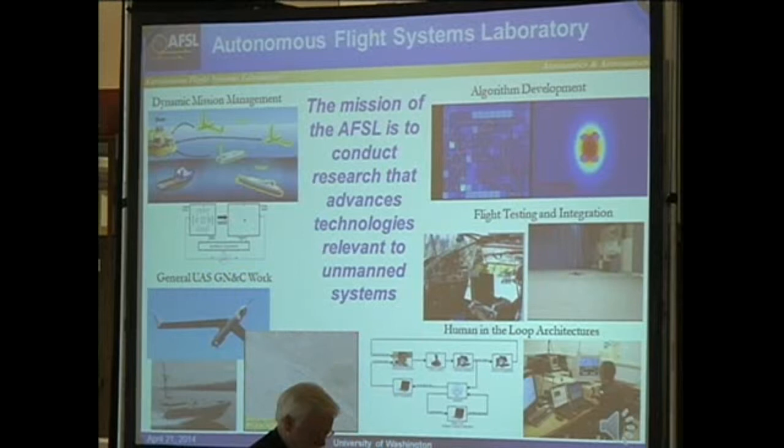The goal of the Autonomous Flight Systems Laboratory is to conduct research which advances technologies relevant to unmanned systems. Historically, the majority of our work has focused on control algorithm development, but we're also very interested in things like flight testing and integration, human-in-the-loop architectures, and general UAS research.

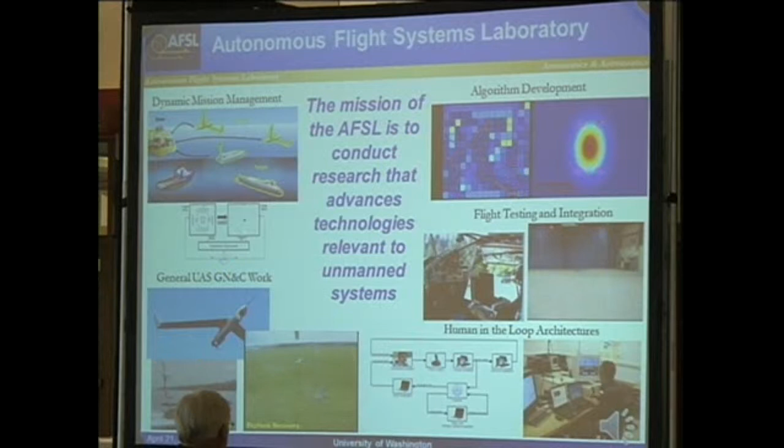One of the things that makes our group unique is that we're very interested and focused on transitioning ideas out of an academic university environment and onto fielded systems.

This current JCATI project focuses on partnering with Insitu, a UAV company that Dr. McGeer started, based out of Bingen, Washington. They're actually a wholly owned subsidiary of Boeing at this point. What they've done historically is produce the ScanEagle UAV, and you guys have probably seen footage generated by it.

You may recall the 2009 hijacking of the Maersk Alabama. Well, that footage was provided by a ScanEagle.

As Insitu starts to diversify their product line, one of the newest and most exciting pieces of technology coming out of that company is not another aircraft, but rather a ground control system and software package. The system is called the Insitu Common Open Mission Management Command and Control, or ICOMC2 system.

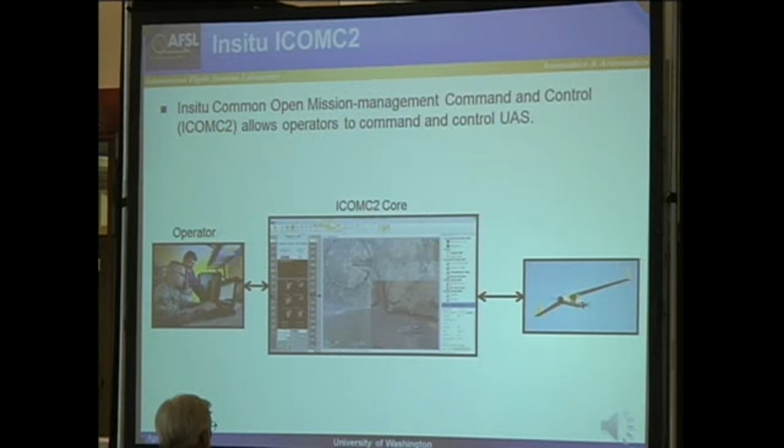The idea with ICOMC2 is that it's a software package that allows an operator to interact with the ground station in a nice, easy-to-use fashion. This system can communicate with and control one or multiple STANAG 4586 compliant aircraft.

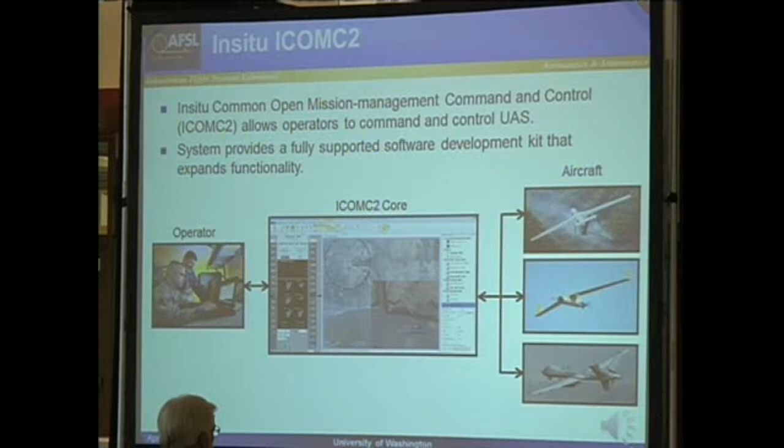What makes ICOMC2 unique is that it supports a fully supported software development kit that can be used to expand the core functionality of the system. Our JCATI project makes extensive use of this, because we're trying to create an additional application which runs on top of the core to extend the functionality of the entire system.

This software model probably sounds familiar to you, and personally I think about it every time I download an app onto my phone. I know Insitu probably doesn't want me saying this, and it's probably not their official marketing term, but I like to think of ICOMC2 as almost like an app store for UAS.

Do you guys remember those iPhone commercials with all the happy background music, saying things like, do you want to check how many calories were in your lunch? Well, there's an app for that. Do you want to log into your webcam to watch your dog sleep while you're at work? Well, there's an app for that, right?

In our situation, we want to take the system and extend the core functionality to assist unmanned systems. So our pitch might be more like, do you want to increase operator situational awareness in a multi-UAV stochastic system? Well, we have an app for that.

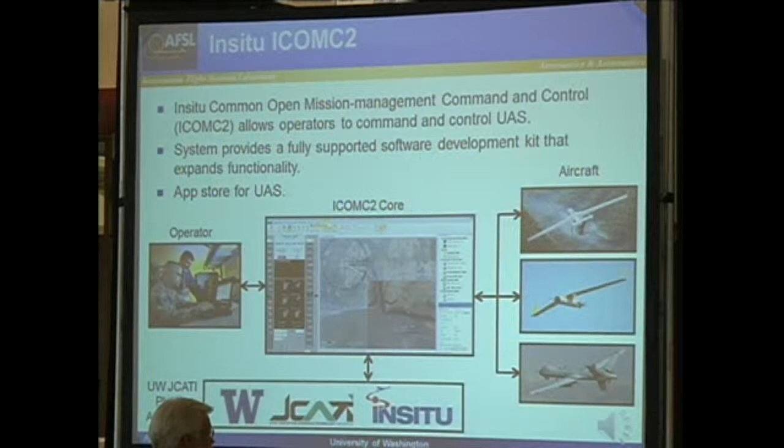I guess if you say it like that, it doesn't really roll off the tongue, so I'm sure Insitu's marketing team needs to do a little work on that before we run the ad, but that's the general gist. So what are we trying to do here?

There's been a lot of talk here, and I've been chatting with people at the networking session. There's a lot of excitement about the possibility of operating multiple aircraft simultaneously in the national airspace in the near future. Amazon.com would love to have you believe that soon we'll have a swarm of drones over the city dropping packages off to you within minutes of purchasing it.

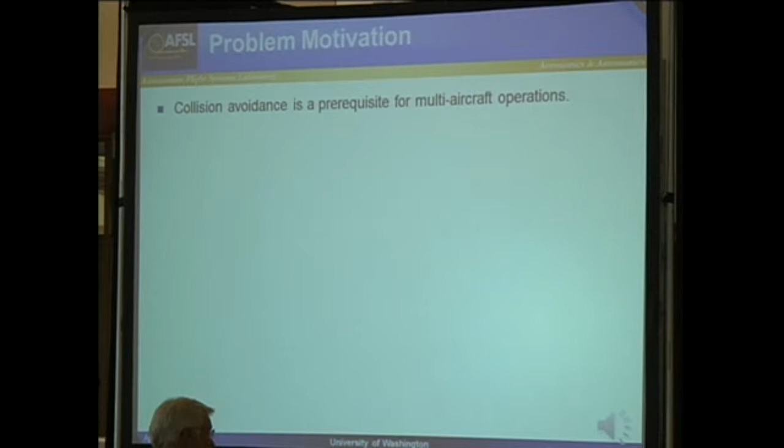But the reality is, in order for that kind of vision to become reality, there are infrastructure and baseline technologies that I think are important for us to investigate. Collision avoidance is probably one of the most important of these.

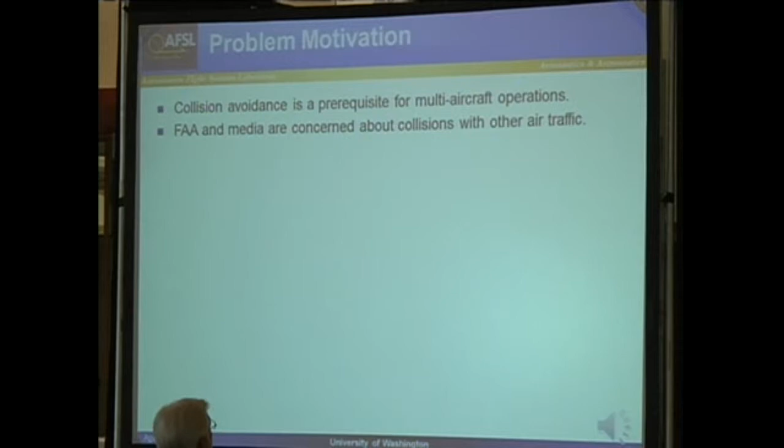So what do we have to worry about with collision avoidance for unmanned air systems? The FAA and the media would probably like you to believe that you really need to worry about collisions between unmanned systems and general aviation traffic.

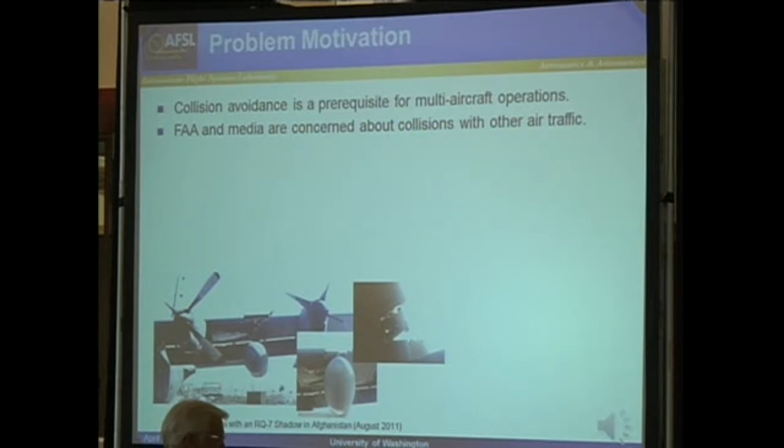This has actually occurred. These are pictures showing an incident in 2011 where a C-130 collided with an RQ-7 Shadow over Afghanistan. I don't have a picture of the RQ-7 because, as you can imagine, it didn't fare too well in this meetup. It was interesting that Bill Rodman was talking about working on wings for the RQ-7 - maybe if it had those wings, the Shadow might have turned out a little better. But in this case, it didn't work out so well.

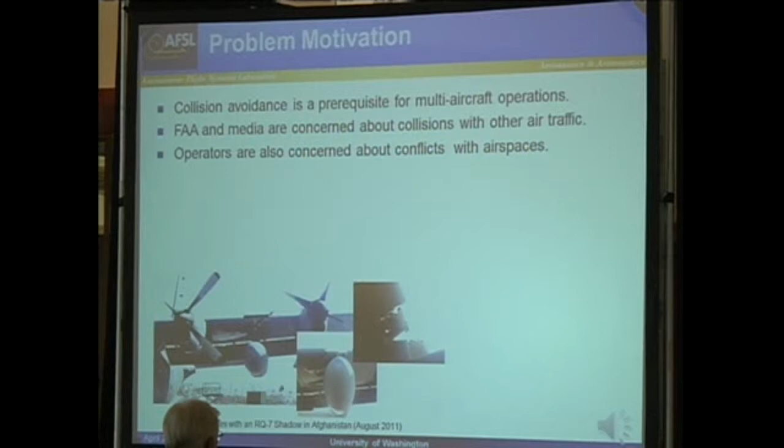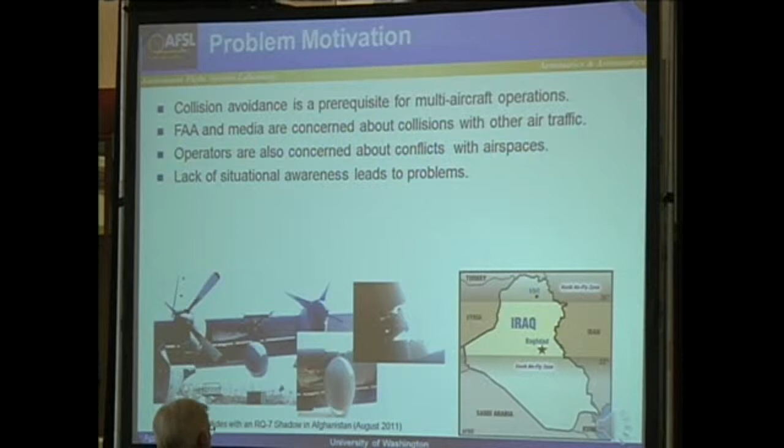So in any case, what really causes a problem from an operator's perspective is a lack of situational awareness. What we are trying to do is create a collision warning plugin or app for the ICOMC2 system, which is in charge of increasing the operator's situational awareness with respect to future collisions or conflicts.

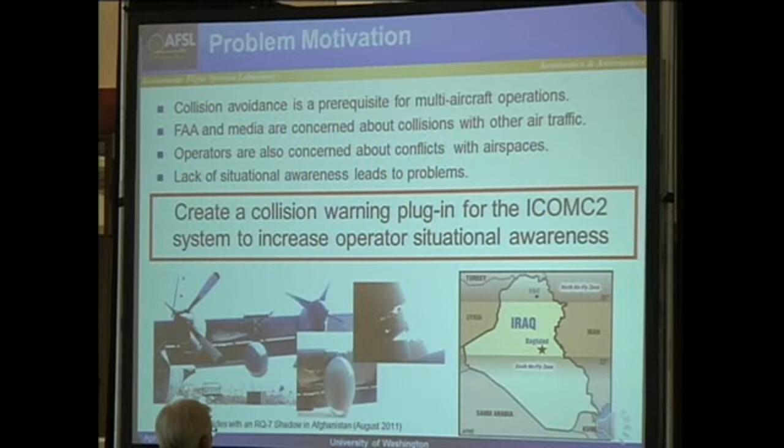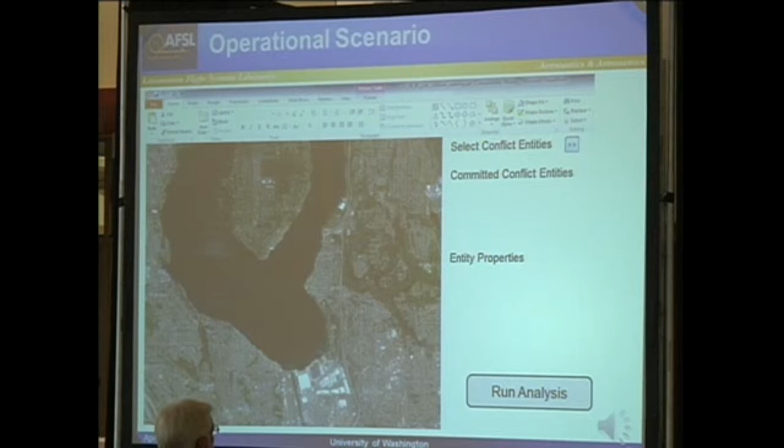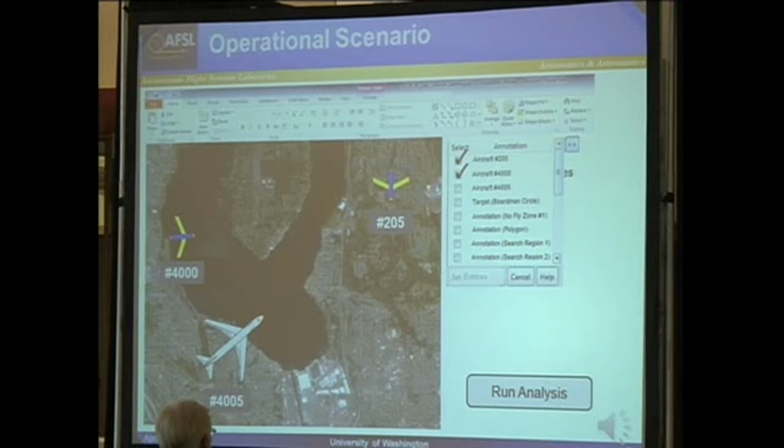I think the easiest way to look at this is to walk through a use case of how this system might be used within ICOMC2. In this scenario, you might have multiple entities in your theater of operations. We'd like to provide the operator a way to select from that list and say there are certain aircraft they care about our plug-in managing. Once the operator has chosen these entities for the plug-in, they would be able to select an individual vehicle.

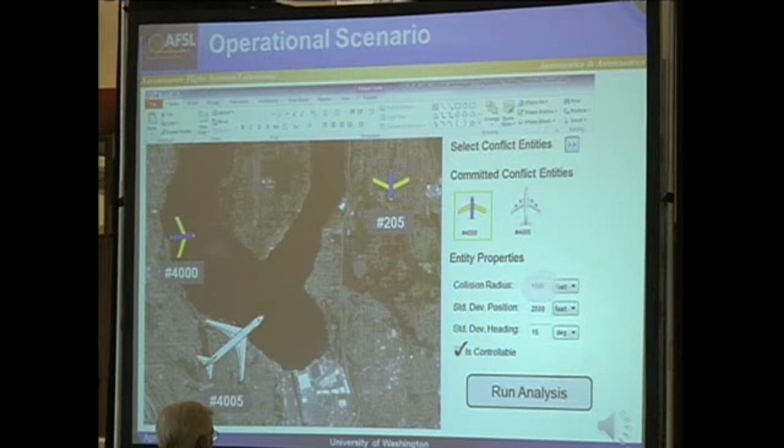Then they could potentially modify vehicle-specific parameters - for example, increasing the buffer radius or the airspace that a certain vehicle claims. Once the system has all of this information, it would be able to run some kind of stochastic analysis and provide feedback to the operator, highlighting areas of potential collisions or conflicts in the future.

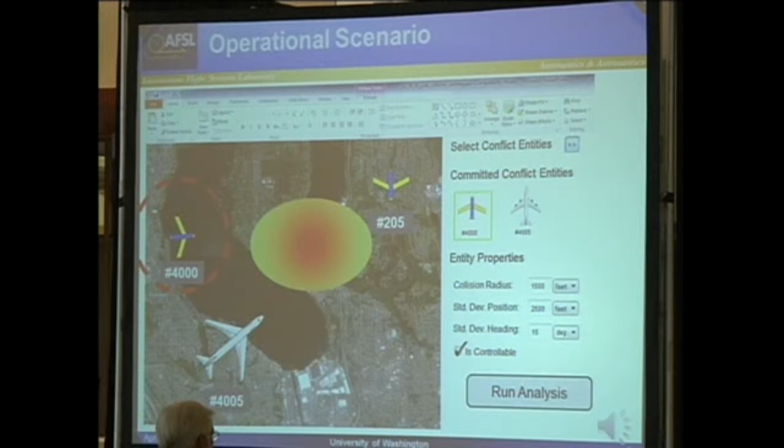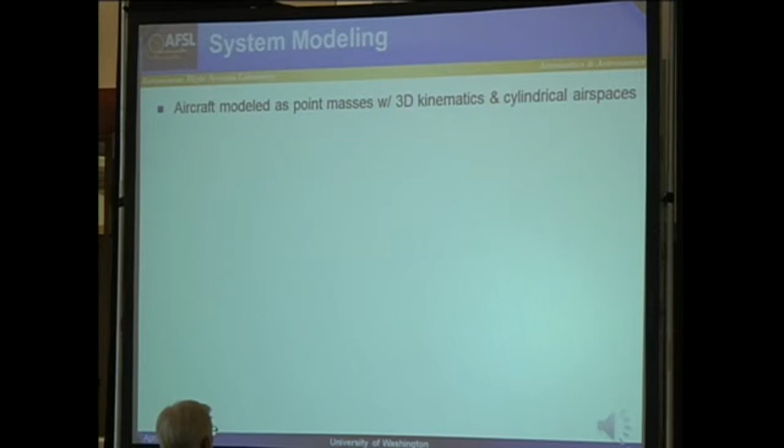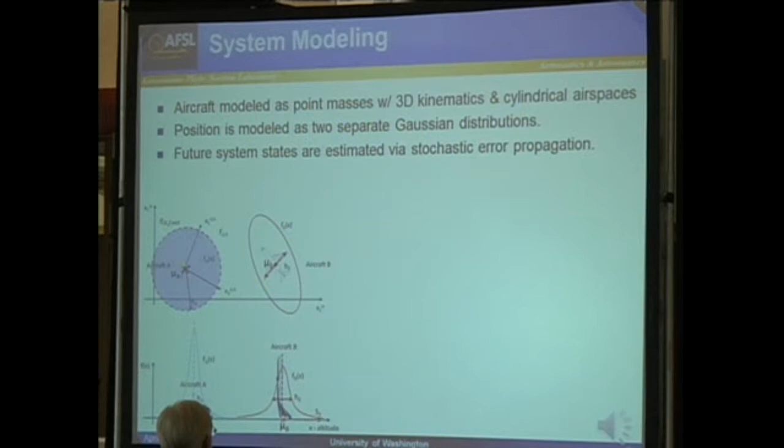Behind the scenes, we're modeling these aircraft as point masses with 3D kinematics and cylindrical airspaces. We also want to model the positions of these aircraft as stochastic random variables. We use a two-dimensional Gaussian distribution to describe the planar position of the aircraft, with an independent normal to describe the altitude. Once we've got all of that information, we can propagate the system states forward using a stochastic error propagation technique.

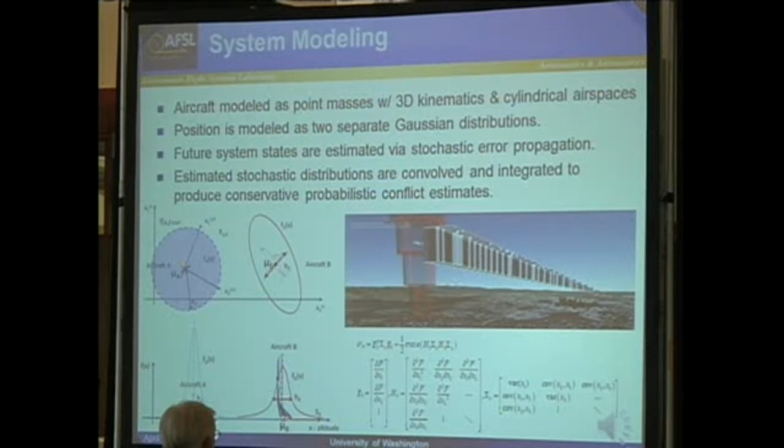For example, on the graphic on the right, if the aircraft starts out in the background, we're able to propagate the system states forward and estimate where it's going to be. You can see this illustrated by increasingly large confidence ellipses as you go forward. Finally, once we have these future state estimates, we're able to convolve and integrate them together to provide conservative probabilistic estimates of potential future conflicts.

I think the easiest way to look at this is to just look at this scenario in action. We've got a very simple simulation showing how this system works. To briefly describe it, we've got two entities here - one aircraft off to the west, which is supposed to simulate a commercial airline flight going from Seattle to Pullman.

Maybe this is the flight some of you guys were on. Personally, the students and I actually caught the bus. And there's a funny story with the bus, too - we picked up the bus at UW and came over here.

We were expecting it to be like this Greyhound charter bus, but when we picked it up, it turns out that somehow it was actually the University of Washington football bus. So it's this big purple and gold monstrosity that they drove over here and parked behind Cougar Stadium. The driver said she was going to stay with the bus because she was a little nervous about leaving it on this campus unattended.

But anyway, we've got that commercial airliner, which is just heading east. And then we've got a UAV, launched from the UW campus, actually Drumheller Fountain there. It's going to follow this flight path, illustrated by that cyan-colored line. So let's take a look at the scenario and let it play out and see what happens.

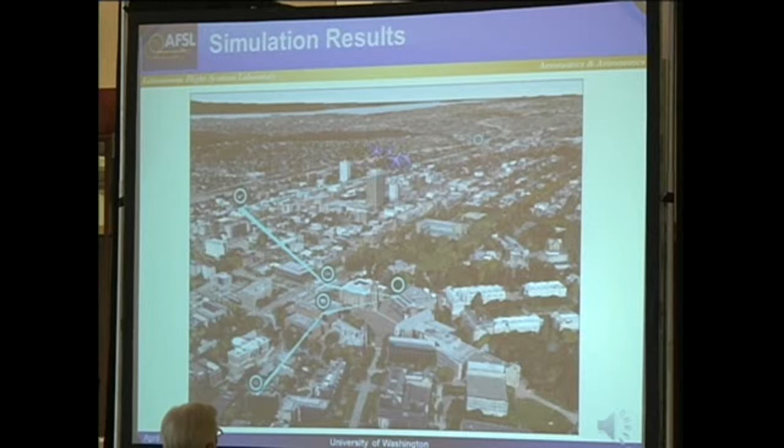As we let this thing go, you'll see that the airliner just continues eastward, and the UAV is following this upward spiral to gain altitude before it heads off north on its flight path. Due to extreme misfortune, or actually engineering, in our scenario, near the end of the simulation, they come pretty darn close to each other. They don't actually collide, but we consider that a conflict. So let's restart this simulation and turn on the collision awareness system and see how it helps.

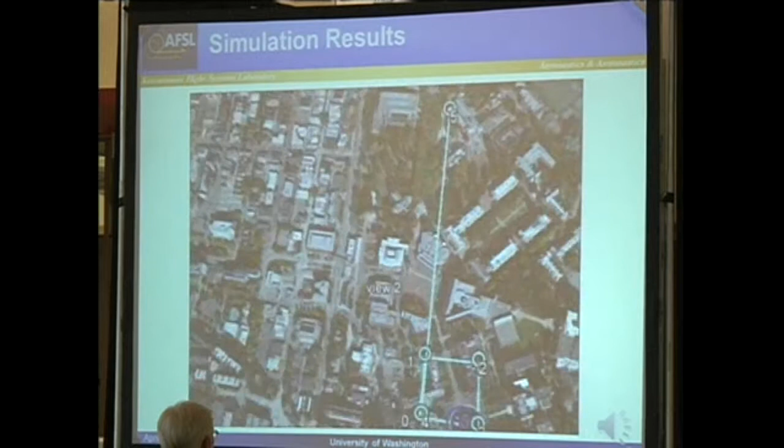So we're looking at this from the UAV's point of view. That blue cylinder down there represents the aircraft's airspace. It's colored blue because there's no chance of collision right now. We can pause the system and look at why. The system is actually propagating or scanning forward in time along the intended flight path, propagating the states forward using this error propagation method. There's no estimated future collision because these estimated future states don't intersect with the airliner's future states, so the aircraft just continues on its mission.

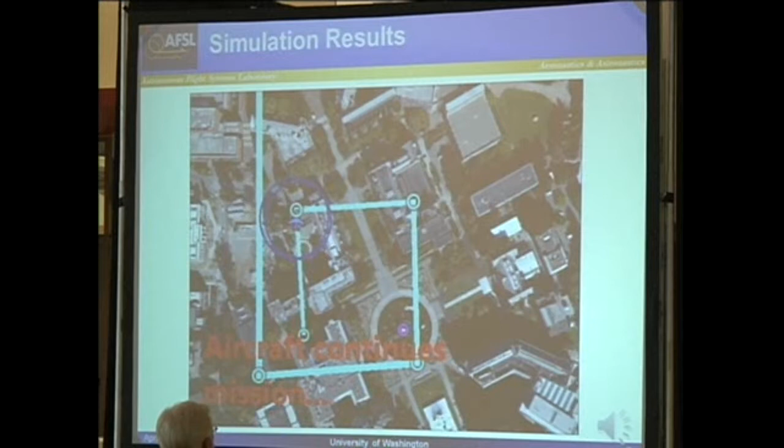As we go forward, pay close attention to the cylinder here. You'll see that as we get closer to that conflict area, the system begins to warn the operator that there's a potential impending collision in the future. It does this by highlighting where the collision may occur, going from blue to red, showing increasing confidence, or that you need to start worrying about this scenario.

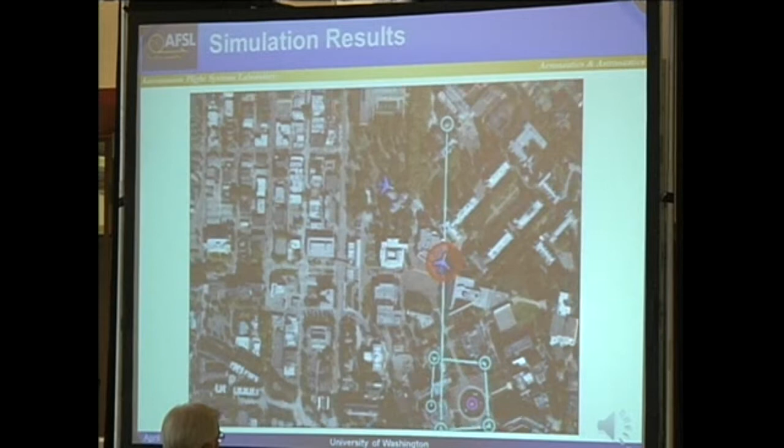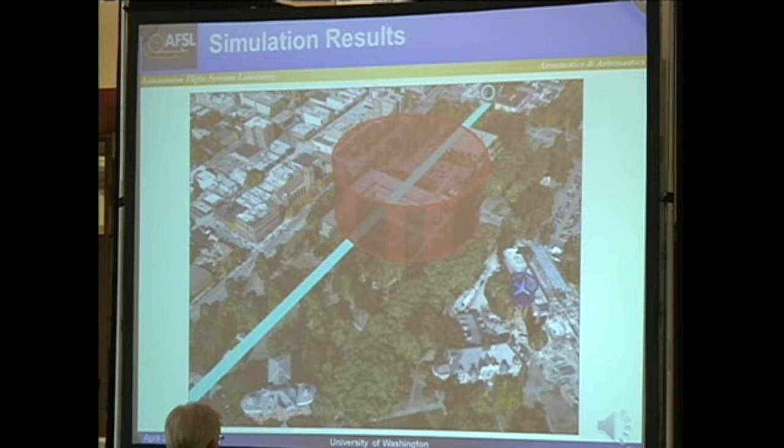So you see that if the operator ignores those warnings, we're now plotting the Scan Eagle's airspace in this red cylinder. Near the end here, that airliner does actually breach your airspace, and we get this conflict as predicted. So that's a pretty simple scenario. We've looked at more complicated test cases as well, but I thought this was the best way to illustrate at a high level what this system is doing currently.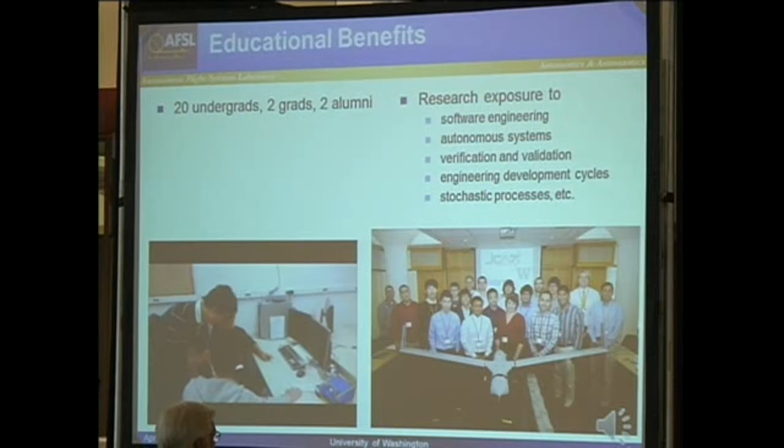That was the technical side of our project, but as you all know, JCATI has an educational mission statement as well. So I wanted to take a couple minutes to talk about some of the educational benefits of the JCATI program at the University of Washington. Over the past 10 months, our group has been very fortunate, involving approximately 20 undergrads, 2 graduates, and 2 alumni students, one of whom you'll be hearing from in the immediately following panel. All of these students have gained exposure to relevant STEM fields such as software engineering, autonomous systems, verification and validation, et cetera.

This research project has also produced over 133 research credits, and by the time we're done, we expect 2 master's theses to be produced out of this. What we're most proud of, though, is that out of these students involved with our JCATI project, 6 of them have been placed into industry as a direct result of being involved with this program.

2 of our students have accepted full-time positions, both in California, one with Boeing and one with a space systems company. 4 of them have been awarded internships for this upcoming summer, many with our industry partner Insitu, and 2 of them have actually been motivated to pursue grad school to continue their studies in autonomous systems.

So as this project wraps up within the next 2 months, we're starting to look at what future endeavors our group might be able to pursue thanks to this JCATI project and the technology that's been produced from it.

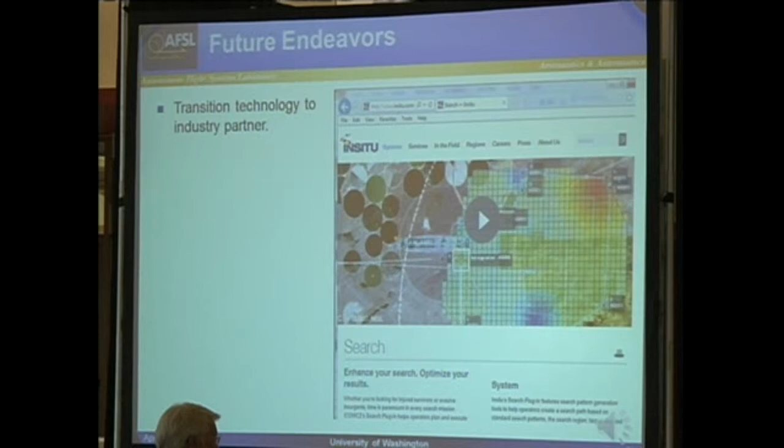Right now what we're in the midst of doing is transitioning some of this technology to our industry partner. We're hoping to work with our university's commercialization office and get this system over to Insitu and entering service within the next year or so.

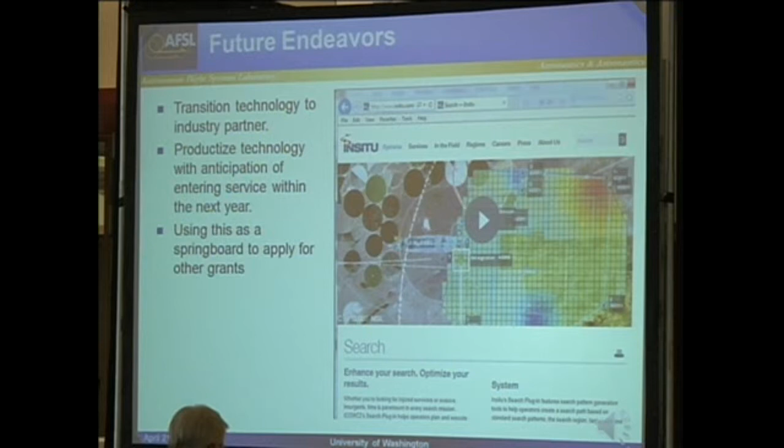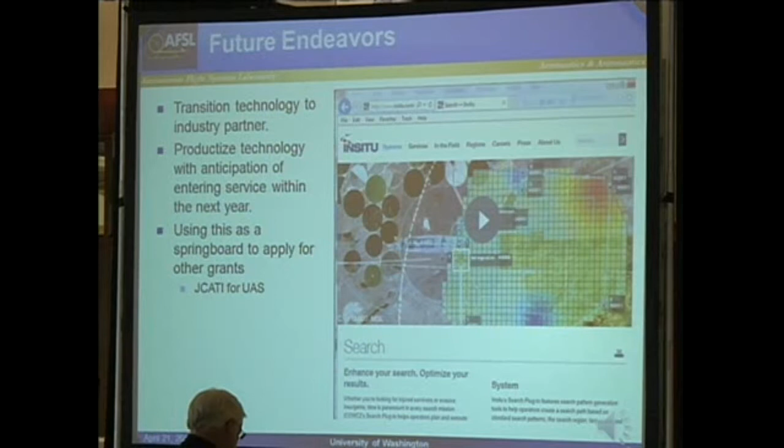Our group is also very interested in using the technology and research developed during this project as a springboard to apply for other opportunities. For example, we're currently pursuing additional JCATI funding for other work related to unmanned aerial systems. There's also a National Science Foundation solicitation for cyber physical systems, and DARPA is about to issue an RFP for collaborative operations of UAVs in denied environments.

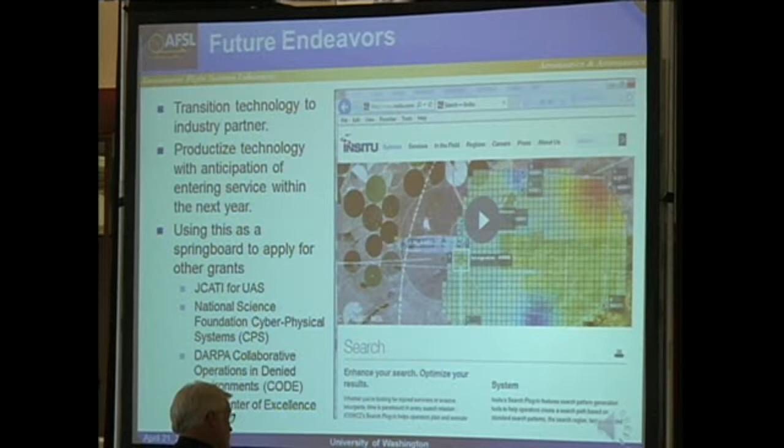Perhaps the most interesting of all these future opportunities is the FAA is about to release a solicitation for an upcoming Center of Excellence focused on unmanned aerial systems. Two of the specified research areas of this upcoming Center are communication/control and detect and avoid. A lot of the technology and research done during this project is going to enable the University of Washington to be an excellent contender to fulfill those two roles.

So just in closing, I hope this short briefing has illustrated how this JCATI project has allowed us to provide engineering, aerospace-related research and employment opportunities for students at the University of Washington, and also to pursue joint industry-university research in new technologies which we hope are very relevant to the future of the Washington aerospace industry.